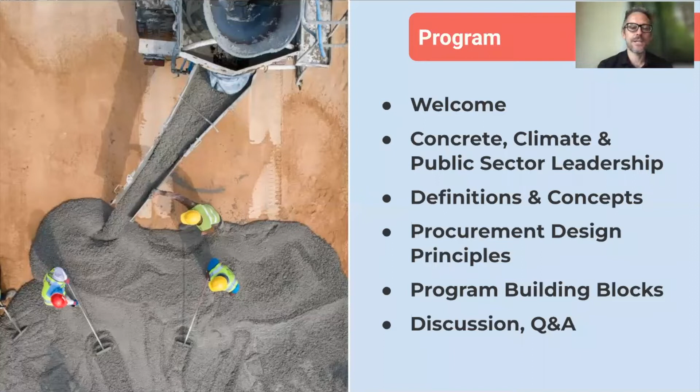Great, thank you so much, Sasha. And I should also say that in addition to being our moderator, Sasha really leads the work on the state and federal level around industrial decarbonization, and I get to work with her and others at NRDC every day. So excited, on the other end of the presentation, Sasha, we hopefully will have a good dialogue and get into the nitty gritty.

So really pleased to be here at this day. Dr. Woodall and I have been working on this guide for a number of months, a lot of research, a lot of conversations. So thrilled to see it get out into the world, and hopefully it will be widely read. What we want to do today is kind of an unboxing, I guess you could say, of the guide. We'll talk about it at a high level, the contents, but with the understanding that we're sharing the guide with you today. So we just want to give you a flavor and an overview of the content, and then we'll get into the Q&A.

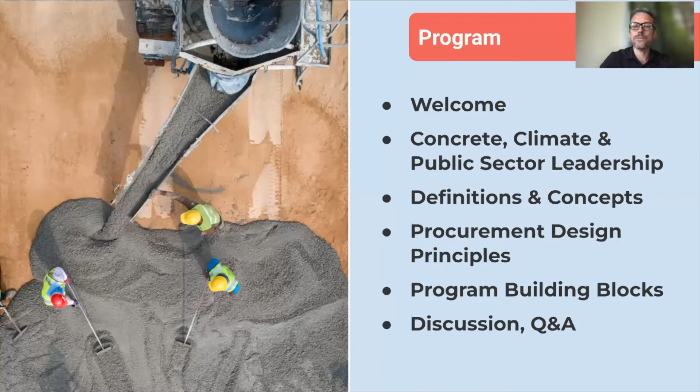I'm going to go ahead and get started with the first part, which corresponds to the first part of the guide. This is some context on the concrete climate connection and how it relates to public procurement, why public procurement really matters in the project to decarbonize concrete.

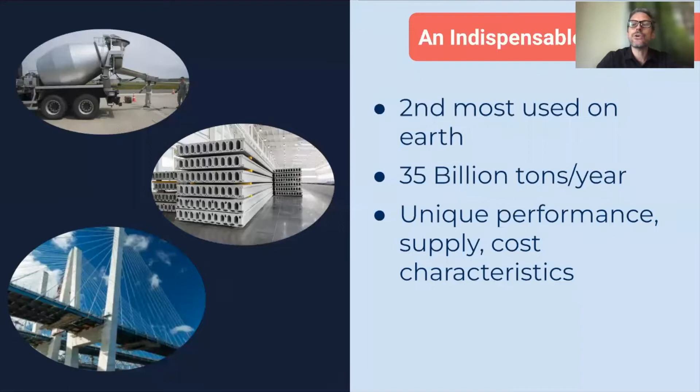To start off, the thing you've got to wrap your head around is just how incredibly important and pervasive of a material concrete is. We live in concrete environments, but it's the second most used material on Earth after water, by far the most used construction material. We don't know exactly how much is produced globally every year, but estimates are somewhere around 35 to 50 billion tons a year.

It's entirely unique. There's a reason why we make so much of it. It does things for the built environment that no other material can do so extensively. It has unique performance, supply, and cost characteristics, which also mean that it's going to be around for a long time, which is meaningful for reasons I'll get into in a second.

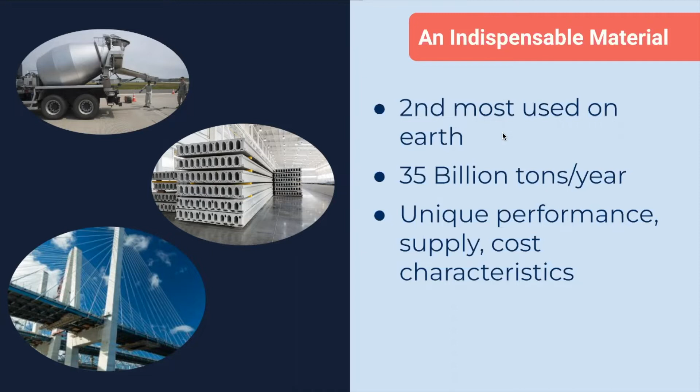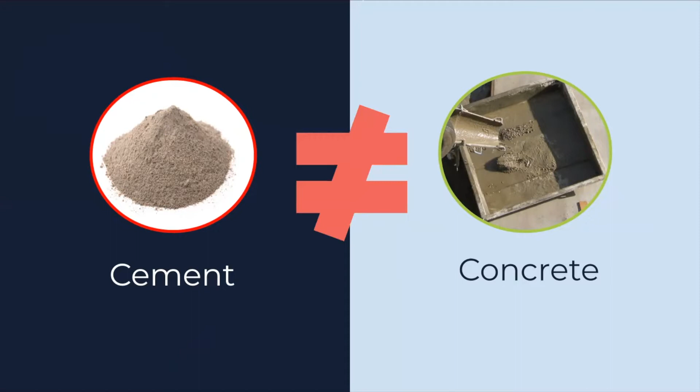One thing that's almost a joke within the concrete world is to really distinguish between concrete and cement. These are related things, importantly tied to each other, but not the same thing. Concrete is the finished material that includes cement, but also has things like aggregate, sand, gravel, water, and other materials—that's what we ultimately make stuff out of. Cement is a really critical ingredient in concrete and it's really relevant to the climate picture, but these are not the same thing. So we don't want to use these terms interchangeably.

Now, what is Portland cement? Again, this is the thing we want to focus on when we think about emissions reduction. It's the key magical ingredient, binding ingredient. Portland cement is the dominant form of cement—it's been with us for about 200 years. This is what you add to these other materials that magically give it its real properties of flexibility and strength, which is critically important. It really matters by application in concrete, but typically it's about 10 to 15% of concrete.

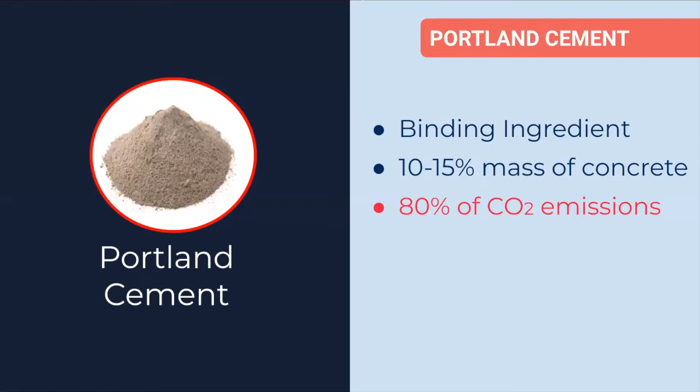But from a climate perspective, it represents about 80 to 90% of total emissions tied to concrete. Based on how extensively it's used, and looking at that carbon intensity, about 1 ton of carbon is produced for every ton of cement that's produced. That means it's a really non-trivial part of the overall emissions picture globally—about 7% total, which if that was its own country, it would be the third largest emitter. It's larger than aviation, but we don't hear about it as much until recently, I would say.

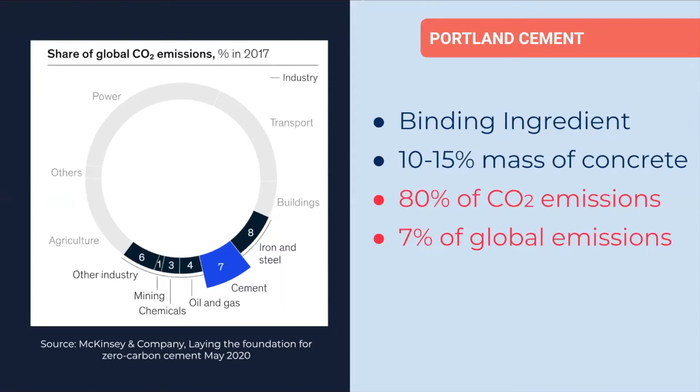It's also a very difficult emissions source to address. One of the things we really want to stress, and why we wrote this guide, is that the role the public sector can play in decarbonizing concrete, beyond just legislation and policy, is really, really significant—uniquely significant, actually. That's because the public sector is the single largest user of concrete for public infrastructure projects, sidewalks, et cetera. Over a third of all concrete produced in the United States is procured by local, state, or federal government.

So it's a major purchaser. Also, governments at the local, state, and to a certain extent federal level are the real arbiters of important standards, specifications, and building codes, which really determine how we use concrete. So there's an incredibly important, uniquely important role for the public sector.

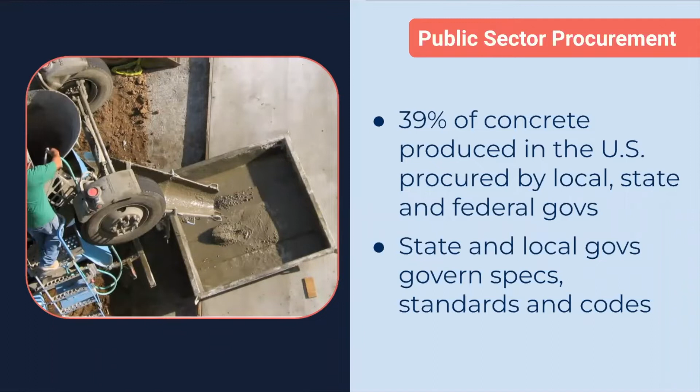The decisions it makes in terms of how it procures concrete are meaningful both in decarbonizing its own substantial concrete-linked emissions, but also the choices it makes will have a ripple effect more broadly throughout the economy. While it took some time, there's been a lot of catch up just in the last couple of years. While me, Sasha, and Caleb were working on this, policies that focus on concrete procurement, climate-linked policies related to procurement, have popped up all over the country.

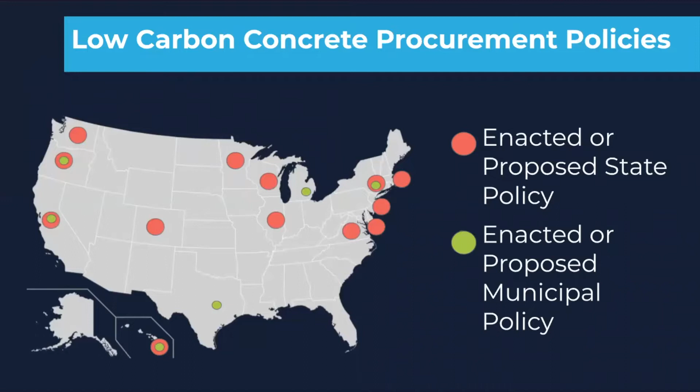So those are either state or municipal policies that have either been enacted or are being advocated for, now all over the country. And I'm probably missing some here—I feel like I learn about another one every week.

Categorically, those policies differ. Some may be familiar with the Buy Clean model, which was started in California. It doesn't include concrete and cement yet, but it's been replicated in Colorado and Washington, and it's being proposed in Maryland. A little bit of it is within the current proposed New York policy.

Then there's another category of legislation called the Low Embodied Carbon Concrete Leadership Act, another approach to procurement, started in New York State. A version of that passed late last year. There's a really exciting version introduced in New Jersey, which we hope is close to being passed, and now a successor to that, even in New York, as well as in Illinois. There was a bill that was introduced.

It's LECCLA. And then there are various states and municipal governments trying to specify particular mixes for concrete that are lower carbon. We're seeing that right now as we speak. The Office of General Services in New York is having a webinar about their proposed green specification, which is actually an excellent one.

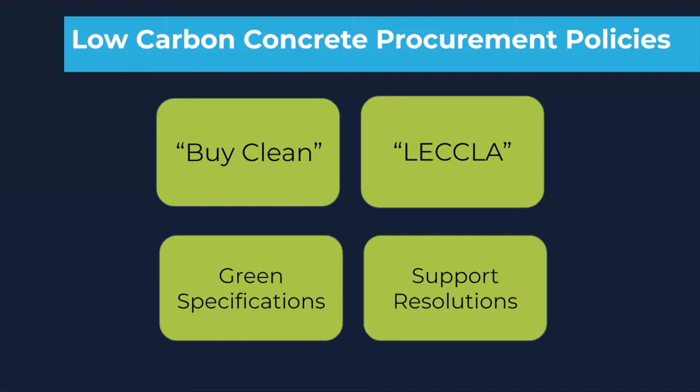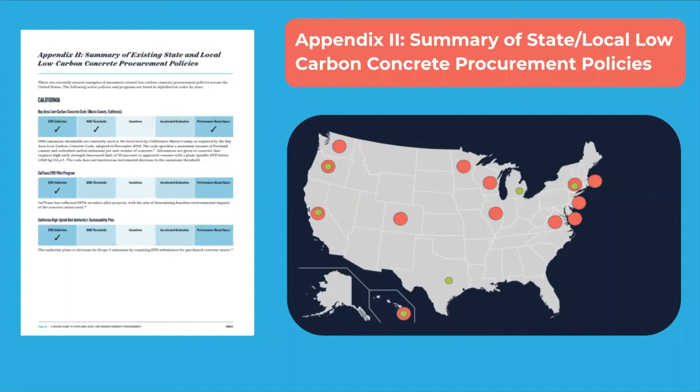So there's a lot of different varieties that we were able to look at when we came up with this guide, trying to streamline what we think are best practices. In the guide itself, one of our appendices, appendix number 2, gives a rundown of different things happening throughout the state and relates them to our recommendations, including a couple things that have popped up since we published it. So that's something you can look forward to when you download the document.

Now I'm going to hand it over to Caleb, who is going to first establish some of the key terms, definitions, and concepts you really need to know in order to get into this subject. So I'll hand it over to Caleb.

Yeah, thanks, Chris. If you go to the next slide, like Chris said, there's a few key concepts you really need to understand to develop a really good low carbon procurement policy. The first one is embodied carbon. When we talk about emissions of concrete, what procurement policies are really looking to alter right now is embodied carbon emissions, meaning the emissions that result from producing a material, as opposed to operational carbon emissions that result from utilizing that material.

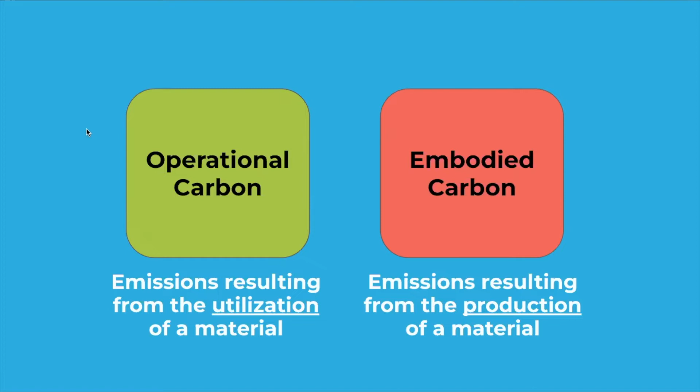If you go to the next slide, embodied carbon emissions really range—you'll hear the phrase cradle to gate. So all the way from extracting the raw materials from the ground, using them to produce key ingredients of concrete like cement and aggregates, then transporting those to the manufacturing facility and manufacturing the concrete product itself. In the case of concrete, the majority of embodied emissions are from cement production, and the majority of that is from process emissions, which result from the chemical reaction when you heat limestone to really high temperatures.

Chris alluded to this earlier, that cement is a pretty hard thing to decarbonize. You can't just input low carbon electricity or low carbon heat. A lot of the emissions actually come from the chemical reaction, so it requires some other solutions.

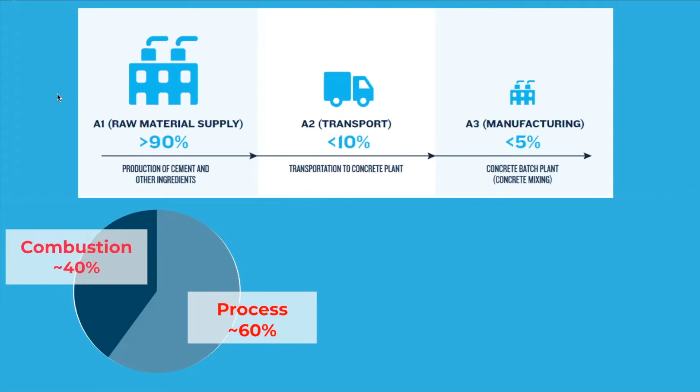Going to the next slide, applying that to concrete—producing low embodied carbon concrete—it's important to know that's not really just one type of concrete. There's a lot of ways you can get to produce low embodied carbon concrete. Looking at the next slide, there's actually a large array of even different categories of methods to produce low carbon concrete.

This ranges from making modifications to a concrete or cement plant, using less cement in concrete, using different types of fuels, or even using a different type of technology called carbon mineralization to store CO2 in concrete materials. A lot of these options are already available today, and a lot of other options are still being developed and will be much more prominent in the near future.

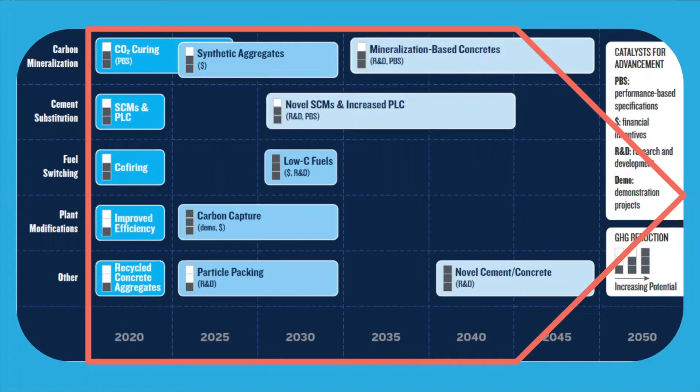And you also see this, and there's a larger description of this in our report of the varying degrees of how these different methods can impact and reduce the emissions of concrete. The really neat thing on the next slide is showing that a lot of these methods can also kind of be stacked together to even further reduce the emissions of concrete.

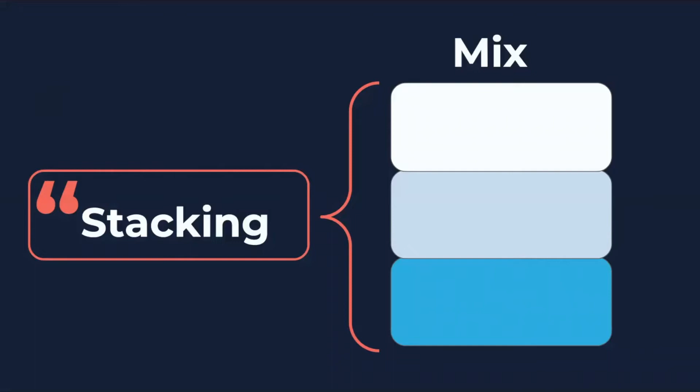And like I said, the next slide, our Appendix 1 goes into pretty good detail of the different methods of reducing embodied carbon emissions, and how each of these can be used.

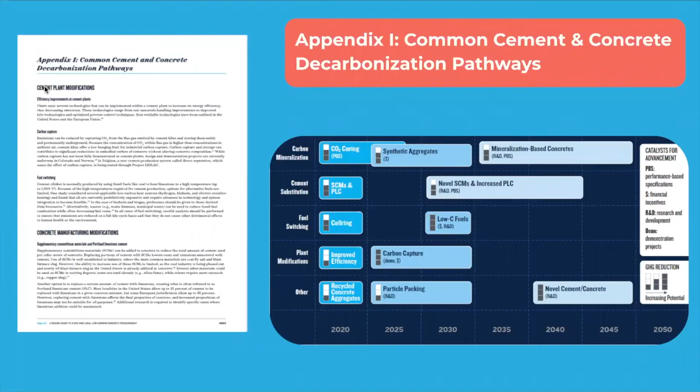So how to measure the embodied carbon emissions? Our best way of doing this right now is by producing an environmental product declaration, or an EPD. The next slide shows that an EPD is actually defined as a type 3 environmental declaration, as defined in ISO standards, which stands for International Standards Organization. But there are a couple of different ISO standards that define these EPDs, and what they require.

An EPD is essentially akin to a nutrition facts label on food, where for a certain manufactured product, it defines the different environmental impacts of that product. These ISO standards require that the EPD be verified by a third party, and that it adheres to a product category rule. In the US, NSF International has developed a couple of product category rules for cement and concrete that a procurement policy could call out when requiring when talking about EPDs.

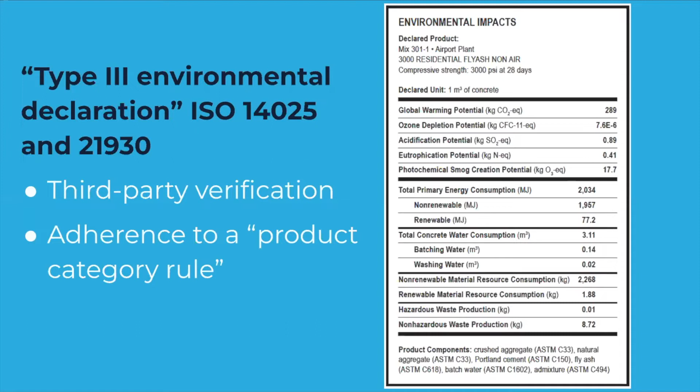The next slide, even further, a really good, robust procurement policy might also call for EPDs being product or supply chain specific. A product specific EPD requires that data be used specifically for a product from a specific manufacturing facility, rather than industry average data.

And the reason why that matters is the different kind of process conditions and materials are used in different concrete products across the country. So it's really important that you use data from the specific location where it's made. And similarly, with supply chain specific EPDs, that calls for specific data of the ingredients that are used along the supply chain of that concrete.

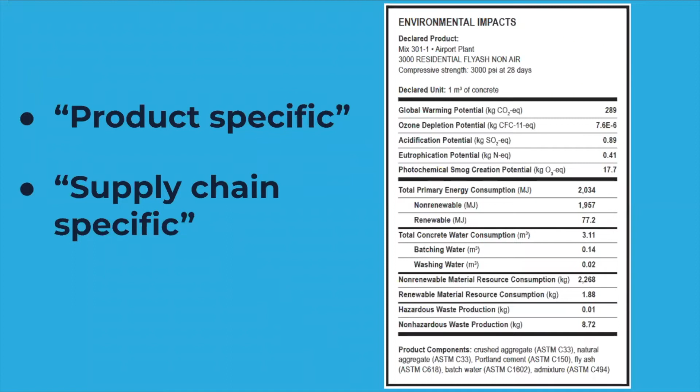Which in the case of concrete, we're really talking about cement, getting specific emissions data from the specific cement that's used in that concrete. A procurement bill in Washington state would require supply chain specific data for components that contribute at least 80% of a product's emissions, which is essentially cement in this case.

And then finally, the way we talk about emissions here in EPDs is in terms of global warming potential, or GWP. That's just the way conventionally EPDs show emissions, and it's in terms of kilograms of CO2 equivalent. It's a way to kind of put all greenhouse gases on a level playing field, where CO2 is the more common one on a volume basis, but you also have methane and nitrous oxides that have a stronger global warming effect, and they also need to be accounted for.

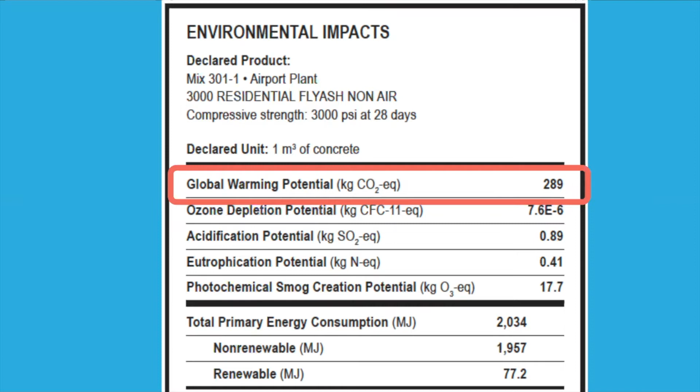So I'll hand it back over to Chris now to talk a little bit about some procurement design principles that are really important in making procurement policies.

Great. And just to stress again, all of the terms that Caleb just covered for us are described in greater depth in the report as well.

So now to get into this, when we think about it, we survey the landscape of the different policies that have emerged municipally and at the state level, and talk to the designers of that and how they've been implemented or how they're being proposed to be implemented, we realize that it's important to not just think about them in isolation, but what are they anchored in? What are the principles that really inform them? Through these conversations, which we describe in depth in the report, there are really 6 design principles that overlap, I think, that really inform good policy.

A really key one is we have to say concrete is a unique material among building materials, but it has to be assessed on its own terms when we're thinking about decarbonization as a material, as an industry. And it also has to be accepted that it's going to be here for a long time, which is quite different from some of the other sectors that we're trying to decarbonize, like electricity and mobility, where the idea is to replace it wholesale with other options.

Here, it's about reforming and evolving and changing this material to make it lower carbon. And that has real implications from a policy perspective. So you can't just impose frameworks or ways of decarbonizing from other sectors.

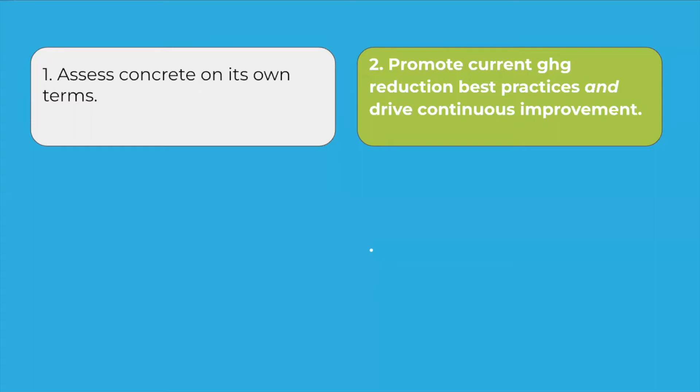Another part, which might seem like it goes without saying but is really important, particularly if you're approaching this from a climate policy decarbonization perspective: there's a lot at stake with getting procurement and specifications for concrete right that have nothing to do with climate. This is the foundation of our built environment that can't just be tampered with whimsically. So any climate objective has to be rooted in, constrained by, and matched with broader public interest objectives around cost, safety, quality and durability.

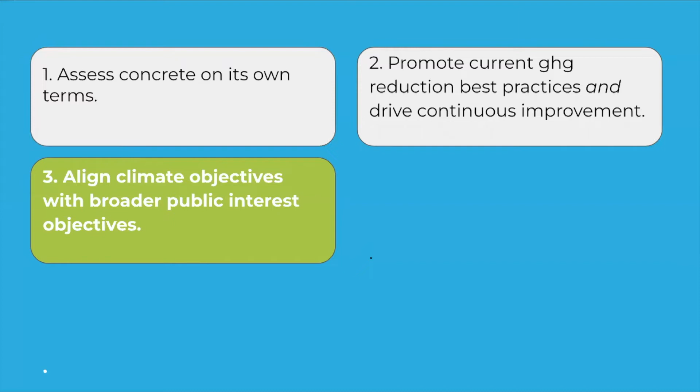This involves really directly having conversations with the experts and people in the relevant fields—the people that make the concrete, their providers, the civil engineering profession, both within the public sector and outside of it. You really have to have these folks at the table, informing the policy, so that it's grounded in reality, fair, and so you can avoid important unanticipated negative impacts. Having those conversations with stakeholders is critically important.

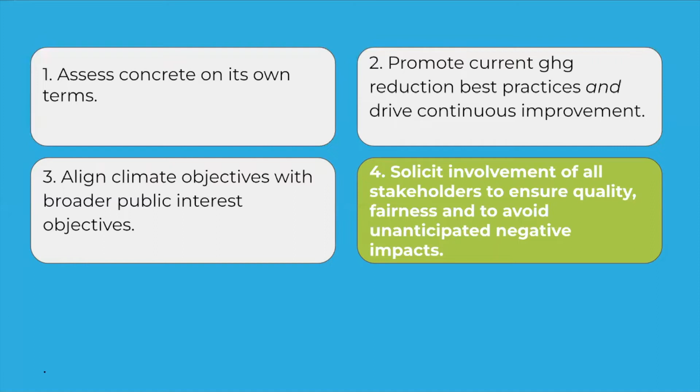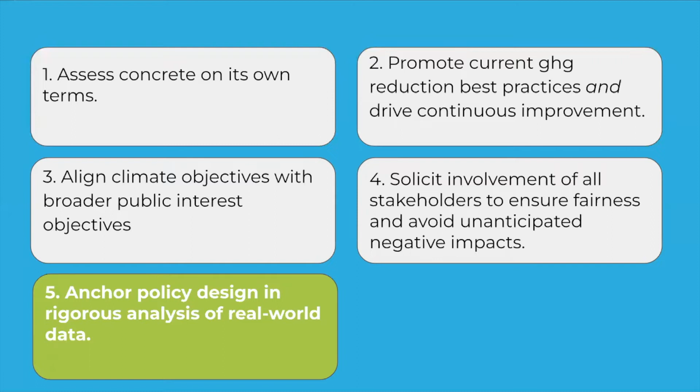Another one is that concrete is highly localized. The material, if you're in the Northeast, needs to do different things than if you're in Arizona because of environmental differences. So when you're coming up with guidelines, maximums or thresholds, you have to derive that from data about concrete in that area. You really have to develop your numbers, not in the abstract, but from what is actually poured in the area where you're making policy.

And then we put this last, not least, but really almost most important: there has to be a do-no-harm principle firmly in place. Not everything that reduces carbon necessarily delivers other goods.

There can, in certain cases—particularly around fuel swapping—issues. The fuel used in cement is most commonly coal and natural gas, but there are proposals to use, and it is used around the country, hazardous waste, tires, and things like that, which may actually be less carbon intensive as fuels, but might produce more significant air quality issues impacting local and even regional communities. So these have to be considered when we're trying to promote low carbon concrete, so that it doesn't come with trade-offs or extra burdens for air quality, for communities, or for ecosystems.

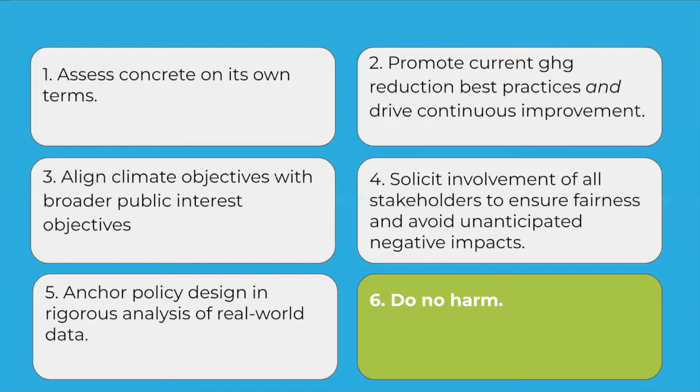So these are the kind of core principles. Again, we articulate them in more depth in the paper, but it's really important to anchor our thinking in these principles. And now we'll get into the building blocks that we think really arise from those principles and from real world conditions.

Lionel LeMay is the policy director at the National Ready Mixed Concrete Association.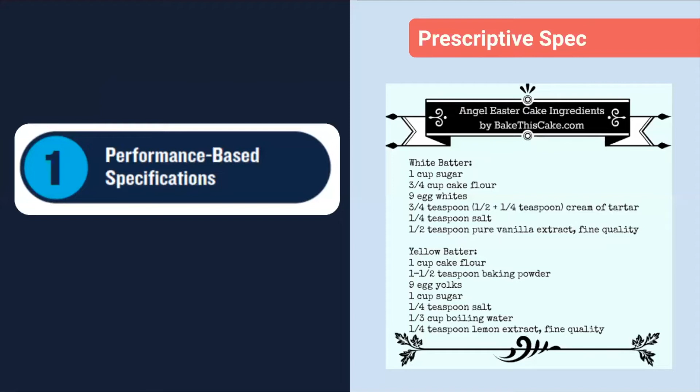So the alternative is what we call performance-based specification, where you're not saying, take a cake, here's what you put in it, but I want it to do certain things. I want it to be creamy. I don't want it to be too fattening. I don't want it to be too filling or too sweet. You're saying what you want it to do, and then leaving it to the provider to come up with what's going to go into the material to do that.

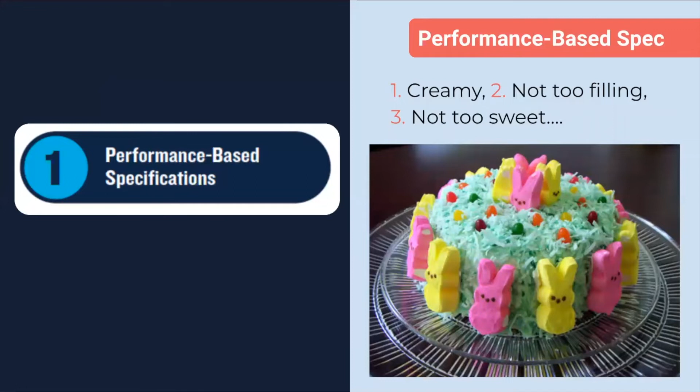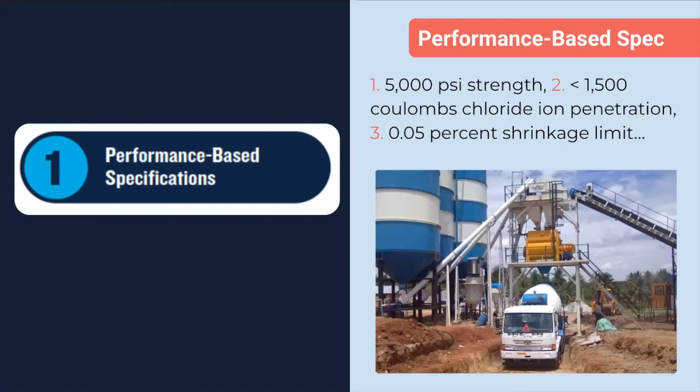In the case of concrete, obviously quite a bit different from cake, those might be PSI strength requirements, chloride ion penetration, shrinkage limitation parameters, and other things specific to a particular region. You lay those out, and then you're giving the provider greater latitude in what they can actually put in. That includes things that lower cost, boost the actual durability, but also lower the carbon footprint of the concrete. This is what we think is key with performance-based specification for really allowing for that innovation and transformation over time. Without it, you're much more constrained.

Another one that relates to enabling innovation is what we refer to as accelerated evaluation for low carbon materials. Even if you have a performance-based specification, there are still limits to what states basically approve in terms of materials and methods. In different states, different agencies are empowered by that. In New York, in most states, I think it's usually the Department of Transportation. They might have a materials division where they will evaluate different materials over time and then add it to the list of what can be used, both materials and methods.

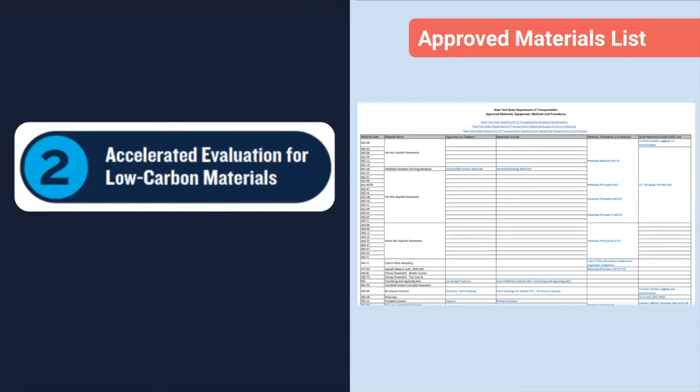The way this changes over time, sometimes it's internal, with the agency exploring these independently, but also providers of materials can apply to have their materials tested and evaluated at their own cost, and then ultimately approved or not approved by the agency. One of the things we've noticed talking to material providers is that often, because of constraints on resources within agencies, or sometimes just because there's not a requirement, there's a lot of delays, or even worse, just uncertainty. You're not sure when your material is going to get evaluated, how long that's going to take.

That translates into what you're going to decide to do. Are you going to focus on that market? Are you going to be able to participate in that market? So what we're proposing is that for evaluation of low carbon materials, if a provider is able to submit a third-party life cycle assessment that clearly demonstrates a reduction in carbon from use of this material, then let's expedite those applications.

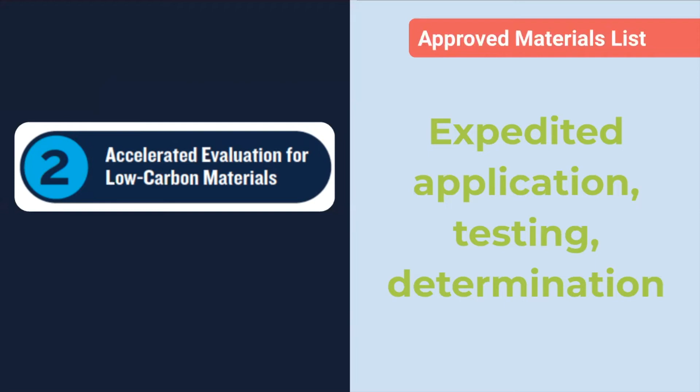That really depends on where you are and the type of material. In New York, for instance, we're proposing in our new bill a 6-month window, so that if you submit it, providers should have some certainty that they're going to at least get an answer within 6 months. We think that is really critical to getting more low carbon materials listed on those materials lists, and therefore giving a greater palette of low carbon options for providers who might want to specify them in projects they're doing for the state.

So now I'm going to hand over to Caleb, who's going to get into the procurement decision building blocks.

Thanks, Chris. So just as it's important to look at material specifications, now you have to look at what decisions we can make in the procurement process to help encourage use of lower carbon concrete.

The first step of developing low carbon procurement policies is requiring EPDs to be submitted with construction project bids. This should help facilitate the collection of local data. We've already talked about how the emissions of different concrete mixes vary widely depending on material availability and local climate, so it's good to develop a procurement policy that collects data on local materials and gives a good idea of the capabilities and emission levels of different concrete products.

For a concrete manufacturing facility to add EPD capabilities, it can cost a considerable amount of money, depending on the subscription plan or how many plants you're setting up with EPD capabilities. It can range all the way up to $8,000 per plant. So another thing to do in a procurement policy is provide tax credits or rebates to these facilities. A policy in Portland, Oregon provides rebates of up to $3,000 per plant to lessen this burden.

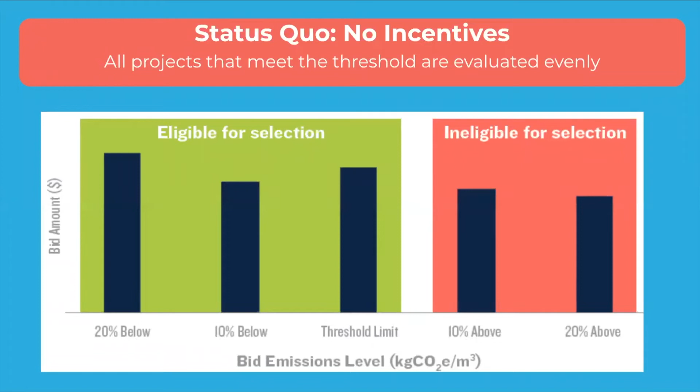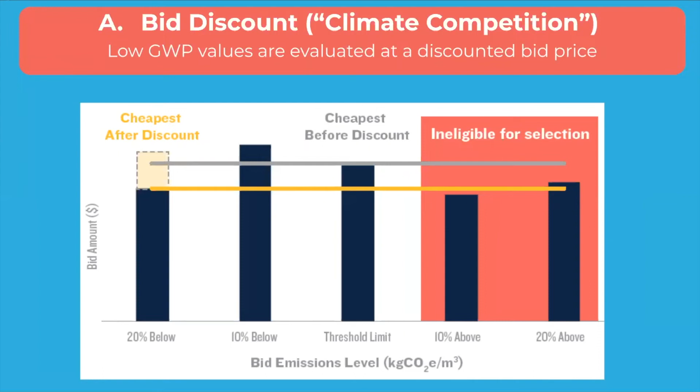Another option is a performance bonus enacted post-construction. In this case, a bid would be selected based on meeting the threshold limit, and after construction, the project's emissions would be reevaluated. If the emissions were actually below the initial proposed level, the contractor would receive an extra bonus for over-complying with the threshold.

This type of bonus we've actually seen in the Federal Highway Administration's National Highway Performance Program, for what's called innovative project delivery, like delivering a project in an accelerated amount of time. So it's not a brand new policy, but it's something that has been proposed in new versions of the LECCLA bills.

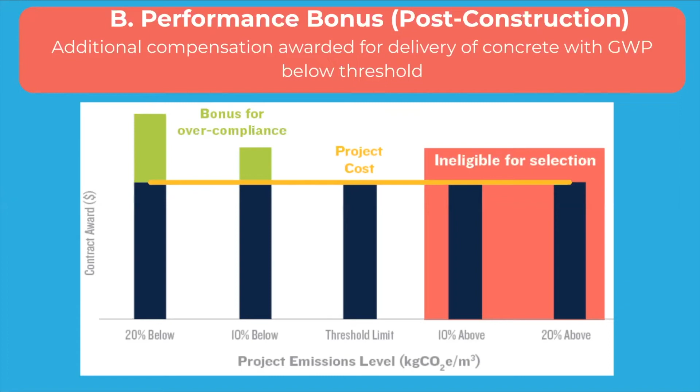And like Chris and I were saying, we have two different types of building blocks, and we really think that all of them are really important to develop really robust policies that give the highest strength of being able to enact low carbon concrete technologies.

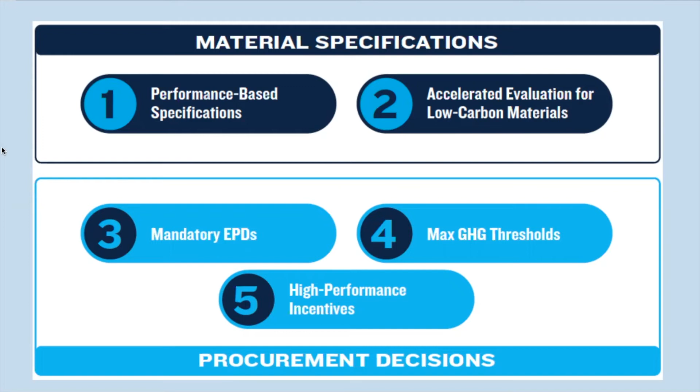Now I'll hand it back over to Chris to talk about some dynamics of how these different building blocks can play together. And again, this is just a very high level overview. All of these building blocks are defined and described, and their variations in greater detail within the guide. So one thing I want to conclude with is that while each of these building blocks are discretely impactful, they all do something valuable.

One thing that is really interesting about the first one that Caleb was talking about, mandatory EPDs, we found that just by requiring EPDs, that isn't just good for data collection, it actually leads to lower GWP scores, because if you have to reveal that publicly, it creates an incentive to try to shave off some GWP, even if there's no incentive for doing so.

So the key part is that while they're all distinctly valuable, there's dynamics between them when you combine them. So we actually recommend this as a full suite of policy levers, because they work together in really interesting ways to enable and amplify each other. I'll give you a couple of quick examples, which are described at length in the guide.

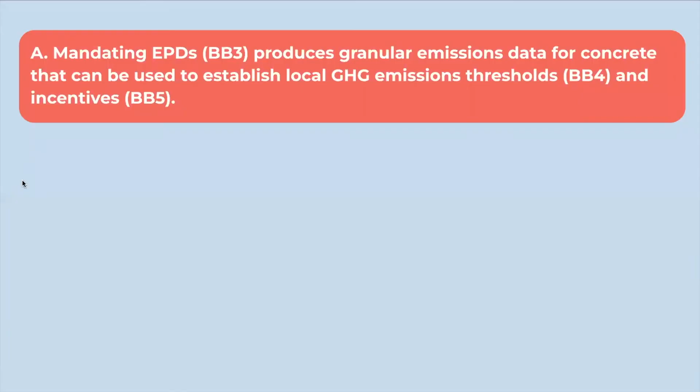One is that when you require EPDs, as Caleb mentioned, that is a data stream that changes over time. That means that the agencies in the state or the municipalities start to see this really particular data about what we're seeing locally, how different types of inputs or carbon reducing solutions start to appear. And can that give us a sense of what is an appropriate place to set our max GHG threshold within our state over time?

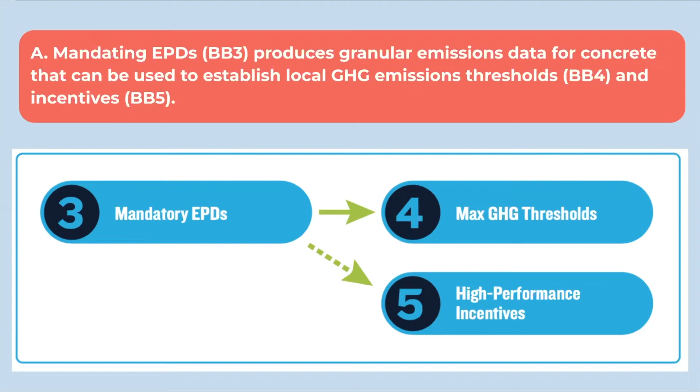So it's just a great source of data to inform that threshold, but it also allows us to think about how ambitious we can be with those high performance incentives as well. It can help you tailor when you set and how you set eligibility for different incentives as well. So those are very much tied together.

This is a critically important one that I can't stress enough: if you want to drive innovation, and particularly if you want to introduce things like high performance incentives, either a bid discount or a performance bonus, you really have to open that up and fully seize the opportunity by adding performance-based specifications and accelerated evaluation, because then that liberates the provider to actually consider a multitude of different materials.

If you don't do that, you have relatively marginal things that you can actually do to reduce carbon, mostly around just the cement you select. So that's a really important dynamic between these building blocks.

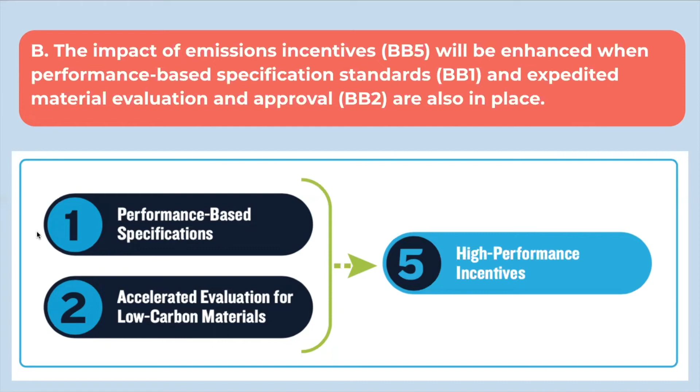And then lastly, these maximum GWP thresholds — if you set a maximum GWP threshold that is already green, let's say it's already better than the status quo, then when you introduce those incentives, you're kind of taking off the table the lowest hanging fruit, and you're incentivizing things that go beyond those. So when you create a threshold that already has sustainability value, already has a climate and emissions reduction value to it, that means the incentives, just by design, are more stretched. They encourage providers to look at things that are maybe not the most obvious or standard already.

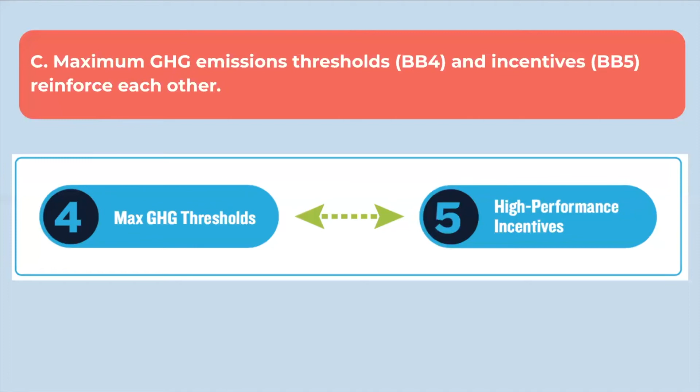So these are just a few important dynamics, and as these get implemented comprehensively, we're certainly going to find other dynamics that apply as well. So it's an important thing to really look at the more-than-the-sum-of-the-parts reality of these building blocks. Again, all of this is included in detail, very practical detail, within the design guide.

And with that, I want to thank you. That wraps up our presentation, and we can go ahead and get into the Q&A.